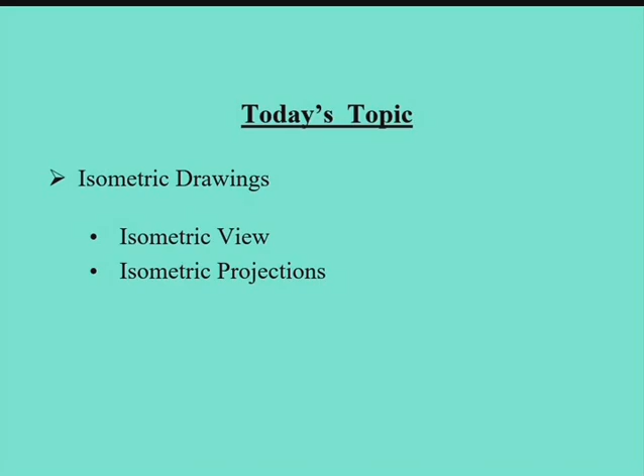Now what is exactly the isometric drawings? It's a type of pictorial projection in which all three dimensions of an object are shown in one view, and if required, their actual size can be measured directly from it.

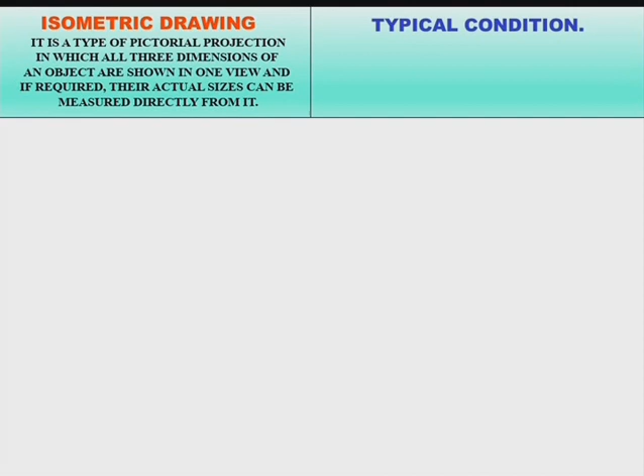This is a 3D drawing of an object. The 3-dimensional axes are maintained at equal inclinations with each other. So since this is a 3-dimensional drawing, we must have a 3-dimensional axis, and that axis is at equal inclinations - the 3 axes having an equal inclination, for example, each other having an inclination of 120 degrees.

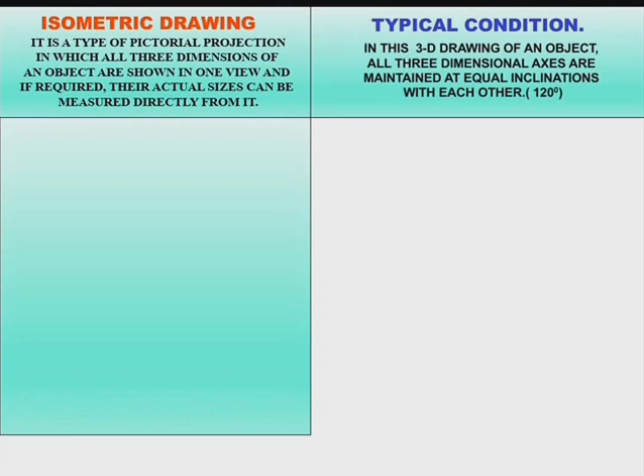And now, more about this - the isometric drawing can be drawn in numerous ways. All these drawings may be called 3-dimensional drawings, or photographic, or pictorial drawings. Here no specific relation between the H, L and D axis is maintained.

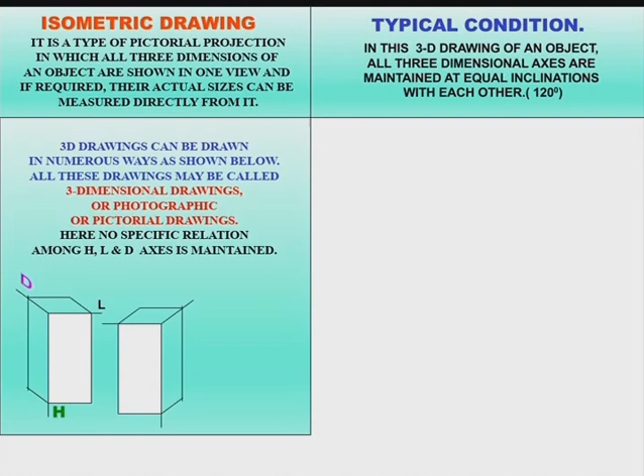So you can see a picture which has 3 axes - D, L and H. These 3 axes have equal inclinations with each other. You can see the pictures of these 3 types.

Now observe below that in the drawings one can note the specific inclination among H, L and D axis. Iso means it is the same, similar or equal. So you can see that there is an equal inclination among H, L and D axis - each is 120 degrees inclined with each other. Hence it is called isometric drawing.

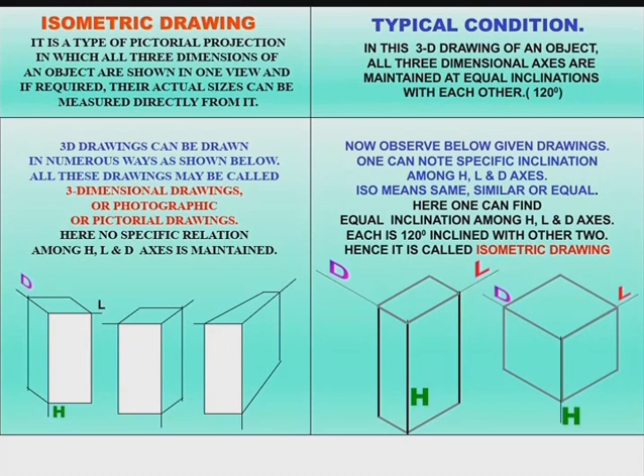Now the purpose of the isometric drawing is to understand the overall shape, size and appearance of an object prior to its production. Now we can divide isometric drawings into 2 types - one is isometric view, another one is isometric projection.

The isometric view is actually the true dimension or enlarged up to 122.5%. The isometric projection is drawn by using an isometric scale. So what is isometric scale? We will tell you about this in the next step.

So what is exactly this isometric scale - we may use the reduced dimensions also. On the left side you can see there is an isometric view, and on the right side there is an isometric projection. You can see that here one is in the true shape, or in the true dimension, or the enlarged one, in the isometric view.

Here in the middle you can see an isometric scale is drawn. How is this isometric scale drawn? There are 4 points mainly: A, B, C, D. First from point A we have to draw a line AB, then draw a 30 degree angle and 45 degree inclined lines AC and AD.

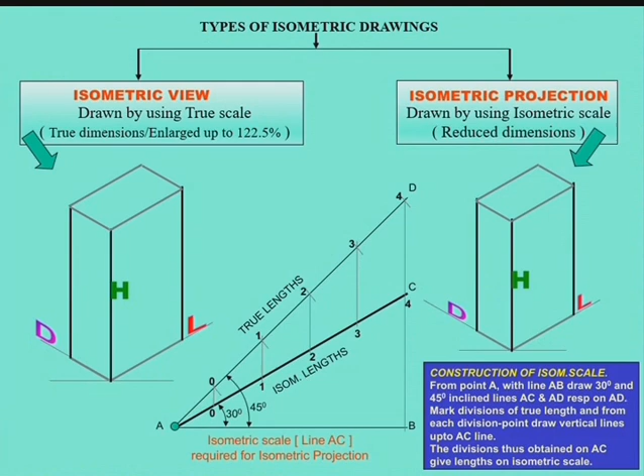When you are going to draw an isometric scale, you can see the dimensions for the isometric length - you can take this AC length. So the divisions obtained on AC give the length for an isometric scale.

Now there is an example we will study about this first problem. A square pyramid of 30 mm base sides and 50 mm long axis is centrally placed on top of a cube of 50 mm long edges. Draw its isometric view of the pair.

So there are two solid shapes actually. One is a cube and one is a square pyramid. So when you place this cube over a floor, over that you have to place a square pyramid.

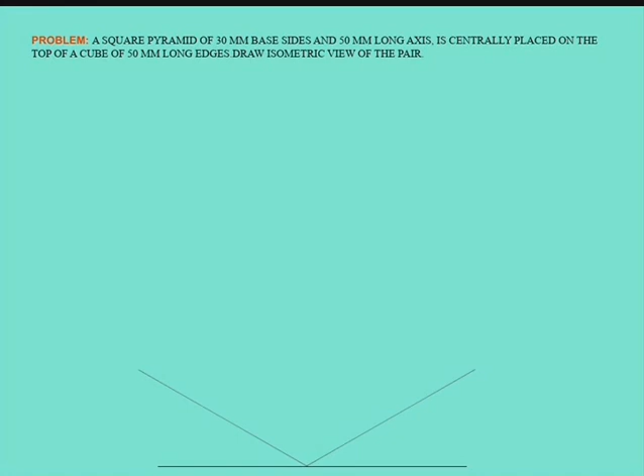Here the drawings are coming. First you have to draw an axis line and then take an angle of 30, draw two lines. These lines are in between 120 degree axis, centrally 120 degree apart.

Now you draw vertical lines, you measure that 50 mm long from the center point to that edge, and then again vertical lines in the center point, and then again take 50 and draw a vertical line.

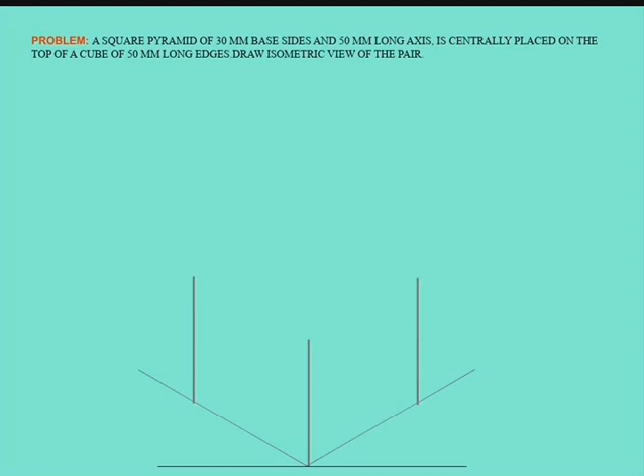So the 50 is actually the given actual length, but you have to make an isometric scale. First you have to draw an isometric scale and corresponding length for the 50, you have to draw from these 2 points. In between these 2 points you have to draw a corresponding length of the 50 mm isometric length. Now draw like this and complete the square.

Now you have to find out the center point. For that you draw two axes in the square and find the center point. And to make the dimension, here it is given that is 30 mm base side.

So now the cube is already done, but now we have to draw the square pyramid. In the square pyramid, the base is given as 30 mm, so this dark line is shown as 30 mm, inside there is 30 mm equally.

So that is 15 mm one side and 15 mm other side, making it 30 mm, 30 mm total. Now that square is closed.

Now you have to take the height. The height is 50 mm long axis, so it means that you have to take the corresponding isometric scale.

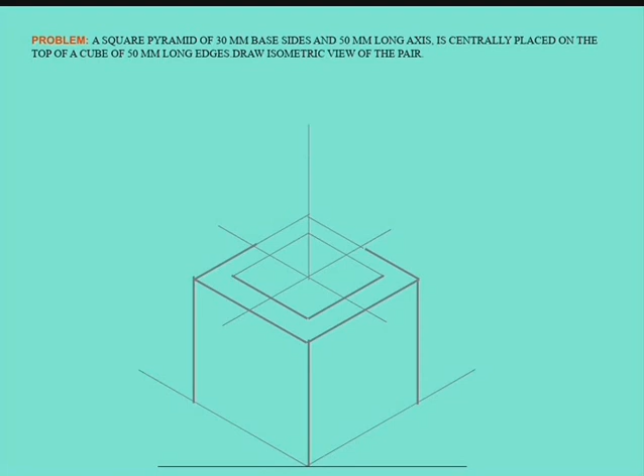Don't forget, you have to draw first the isometric scale, then take the isometric length here, corresponding isometric length of the 50 mm. Now you just mark the height as 50.

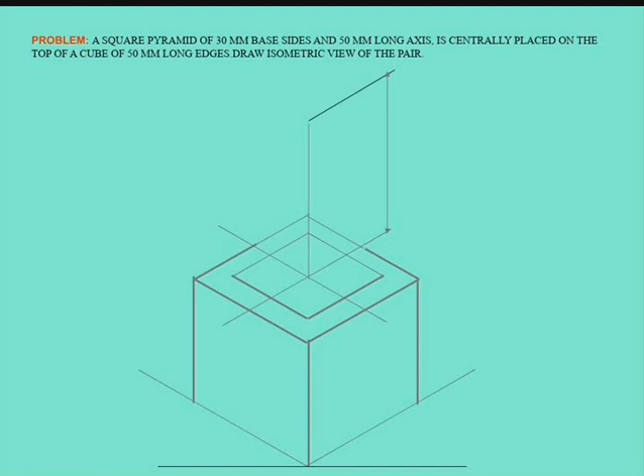Here, if you take the 50 mm isometric, don't use that length to show here as dimension marking. You have to show the 50 mm, meaning you have to show the actual length here. Don't use

the isometric length. For 50 mm, the corresponding isometric scale may come out as 35 or 40 mm. Suppose you imagine 35 or 40 mm comes, but don't use that in here. Use the actual length given in the question.

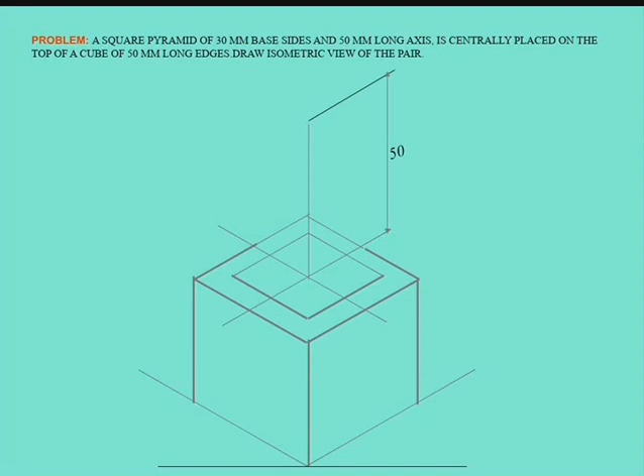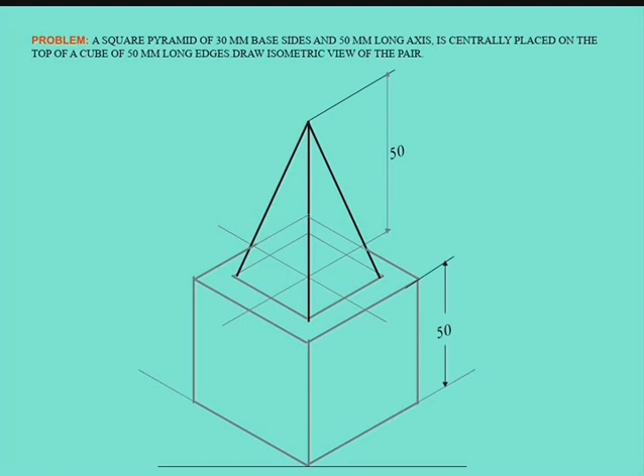Now draw from the top, because this is a pyramid, draw the four sides. Now darken the lines which are visible from here. So visible lines you darken, and draw these dimensions 50, 50, and this is 30.

So this is actually the complete isometric drawing of that square pyramid and also this cube. Remember, this is the first problem, you should clearly understand it, otherwise you can't move to the next one. I think you understand clearly.

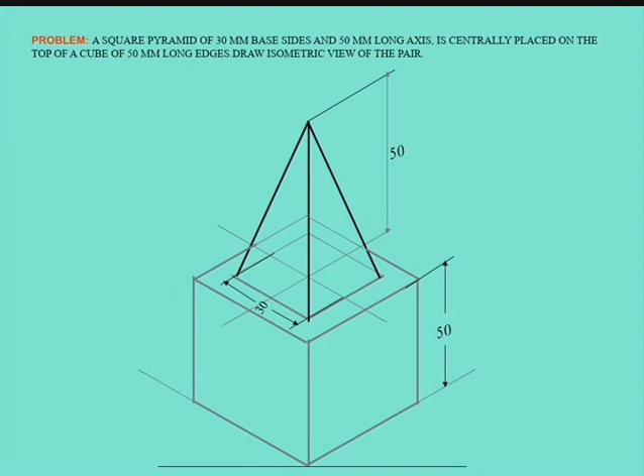First you have to take two bottom lines. First draw an xy line, then place a point, and then 30 degree from this side and 30 degree from this side. You take 30 mm here and 30 here, at 120 degree apart, and then draw the corresponding lines.

Now next problem, we move to next problem.

A triangular pyramid of 30 mm base side and 50 mm long axis is centrally placed on top of a cube of 50 mm long edges. Draw isometric view of the pair.

So what is here actually? A triangular pyramid, the base is 30. So that base is actually a triangular shape. For a triangular pyramid, base is also a triangle shape, having 3 sides also. It said that 30 mm is one of the base sides, and 50 mm is the height of that triangular pyramid.

Now the second body is a cube, that cube is 50 mm long edges. So cube means all the dimensions is 50 mm. Now the cube is placed there on a floor, and over that there is a triangular pyramid. Now we are going to that.

Solution is given. So first you have to draw a line and mark a point, and then two lines as I told you. Then the central line you have to make. That height, what it is actually, that is in the 50 mm cube. So 50 mm is the height.

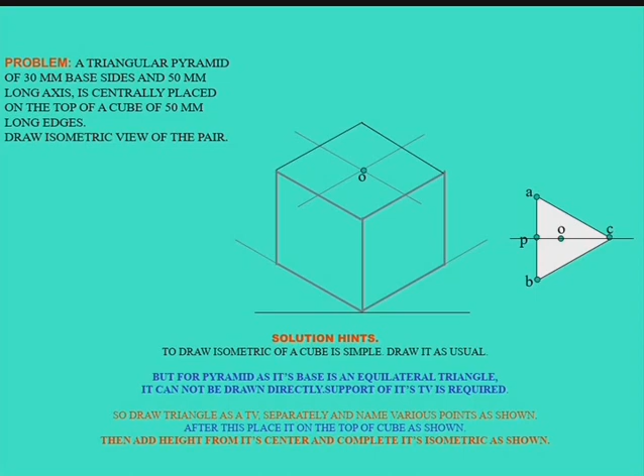So I'm going to show some points here. A, B, C is outside, and in the center I pointed as O and P. Now I just draw a horizontal line, and another horizontal line for finding the center point. So I place a center point here and name it O, and I mark the point C here, and P, and A and B I draw, and then the point C I mark here.

Now each length is a corresponding length. The AB length, how much it is in the pyramid base, is actually 30 mm. AB is 30. First you have to mark a point P. Because you find here A, B, C, you draw in the top view, you can find the O point in the center. So from the O point, how much distance is P, you find the P distance, and then from point P, 15 mm is for A and 15 mm is for B. So you can draw A and B.

If you got A and B, you just take 30 mm in your compass, or you can take it as an angle, or angular dimension, at C you can make it. Or 60 degree, 60 degree you can mark, because it is a triangle, so each one is 60 degree, so you can mark the point C easily. Or you can find O to C distance and mark it here also. So anyway, you first understand all the dimensions, you have to take it from the isometric scale.

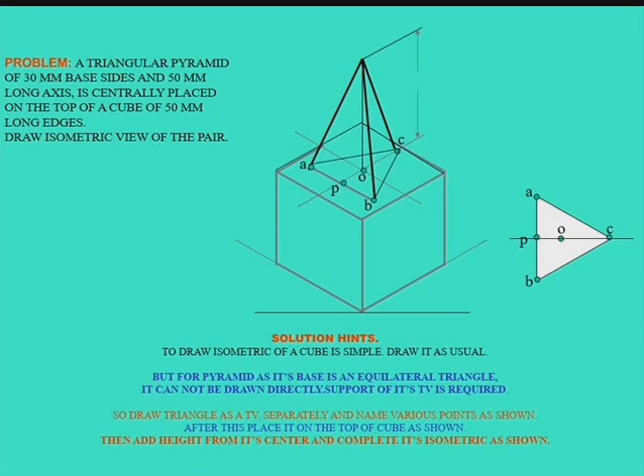Now draw each line in here corresponding to the points, and darken the visible lines, and here it is your triangular pyramid. Then you have to mark the dimensions later - I just forgot to mark them. You have to draw the dimensions also. So this is about the second problem.

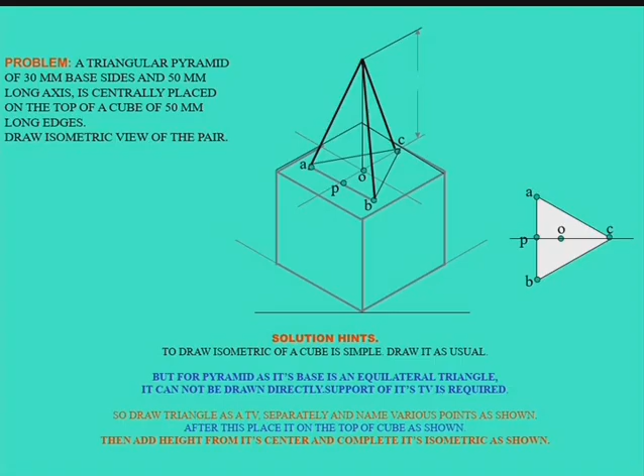Coming to the third problem, here you can see there is a cylinder and a square plate. There is a long cylinder, and in between the cylinders there is a square plate, and you have to draw an isometric view of this. So the front view and top view of this figure is given here. A square plate is placed, pierced centrally, and a cylinder comes out equally from both faces of the plate. The front view and top view are shown, and you have to draw its isometric view.

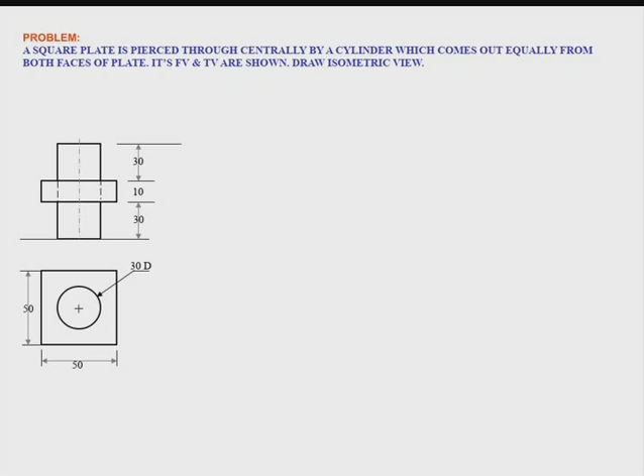So that spelling was a mistake, sorry. Now you are going to draw this - the front view and top view are given, and as I told you, you have to draw a line, with two lines equally inclined.

Then you just draw the height - this height is actually 10 mm, the height of this box. The length, you know, is 50 mm because it is 50 mm lengthwise and widthwise, so you have to draw that, and the height given is 10 mm.

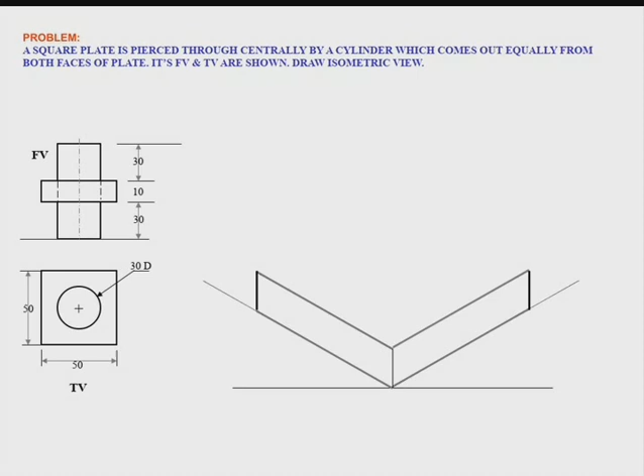All the dimensions you should take from the isometric scale - don't forget that. Now draw these lines and complete this - not a cube, actually a rectangular plate, a square plate. Now mark the center.

So you just mark the center, and inside you have to draw a square. Why is this square important? Because inside this square we have to draw the circle. So you have to draw the circle.

The circle is actually 30 mm diameter, so you have to mark 15 mm on the right side and 15 mm on the left side, upper and lower, to make a square. So the distance from the center is 15 mm and 15 mm, and here you will get a circle.

But in the case of isometric view, the circle is shown as an elliptical shape. When you draw a circle in pictorial view, in the isometric view it looks just like an ellipse. So to get that, if you want to draw any circle in an isometric view, you first have to draw a square plate.

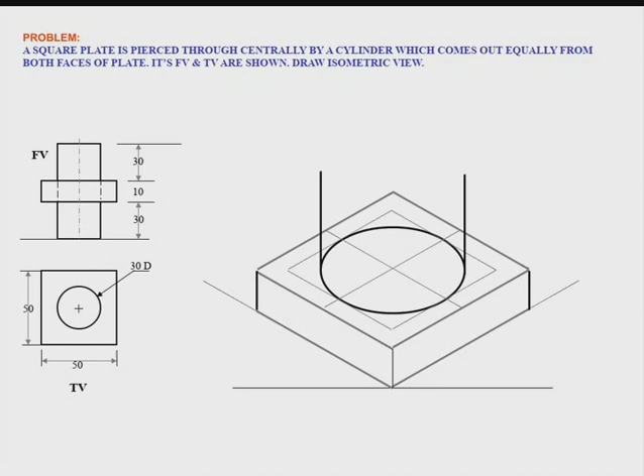Now you have to mark the cylinder height - this is the upper part height, given as 30 mm. Draw the 30 mm height from the center on both end sides. Now you have to draw another axis at the top point, and another circle. Now this is only the upper part.

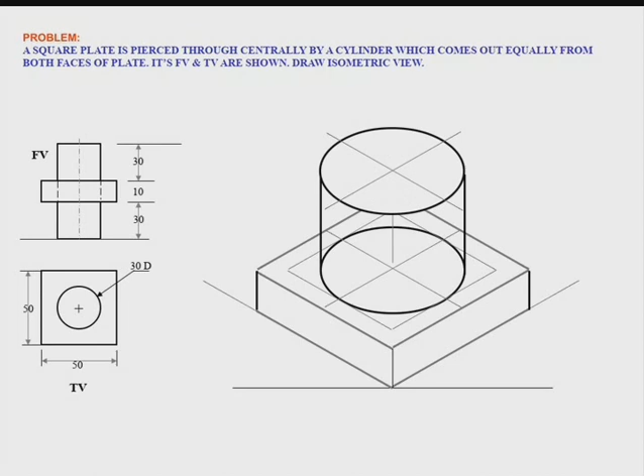Now we have to draw the lower part. Same as before, you have to remove the inside of the cylinder to get a clear picture, because from this side of view, when we see the object, we can't see inside what happens, or that corner of the square plate we cannot see.

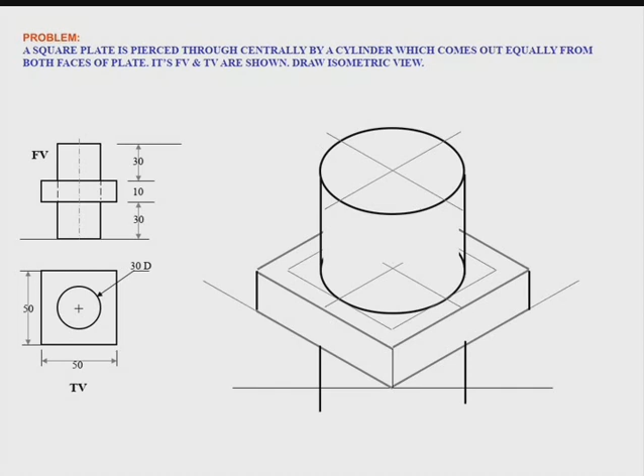So just draw two lines in the bottom, corresponding from the cylinder, exactly matching the circle, and remove the inside part - only keep the outside part. So this will be the picture, the isometric view of the object.

Now another question - this one is a little bit tougher. You have to clearly understand this question properly, because it has been asked in the university exam. A hemisphere is centrally placed on the top of a frustum of a cone. Draw the isometric projections of the assembly.

Okay, so this question is very important. As you know, what is a frustum? A frustum is something like a pyramid-like shape where the top portion is cut out. The bottom remaining portion is actually the frustum.

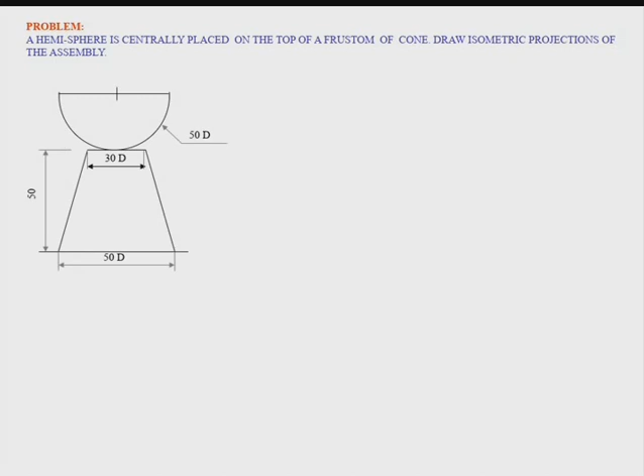Now, for the isometric view, first we have to draw the isometric scale. You can see this is a 30 and 45 degree axis, and the radius. The radius of the sphere inside, I draw as the small r. The small r is the isometric scale value, so capital R becomes the small r. That is applicable throughout.

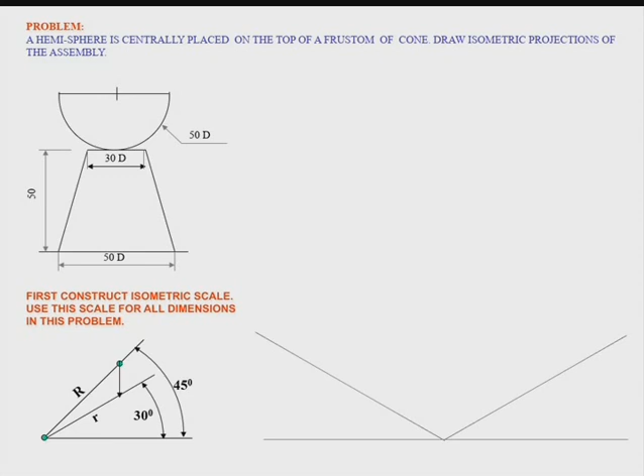Now first you draw the axis line, and second you have to draw the square plate. First the square plate, and then you draw the height. The height is actually 50 mm. So in the isometric, what will be the height? You have to draw it, and then complete the square. You don't need to, but you have to mark the center point.

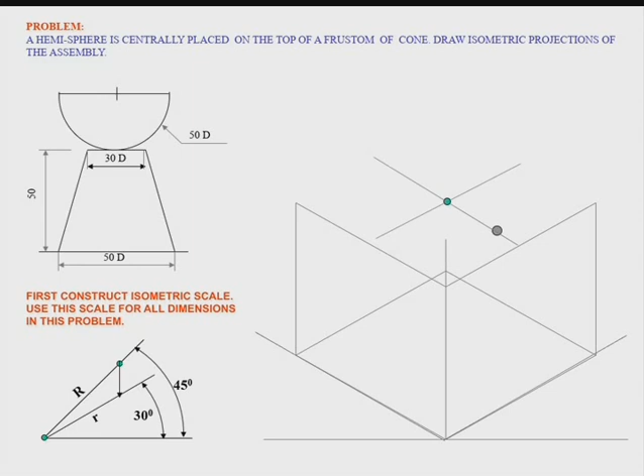From the center point, you mark from the another point which is in the top view. You can see there is a 30 diameter given at the top of the frustum. So for that frustum top, we have to mark the 4 points on the axis line and circle them.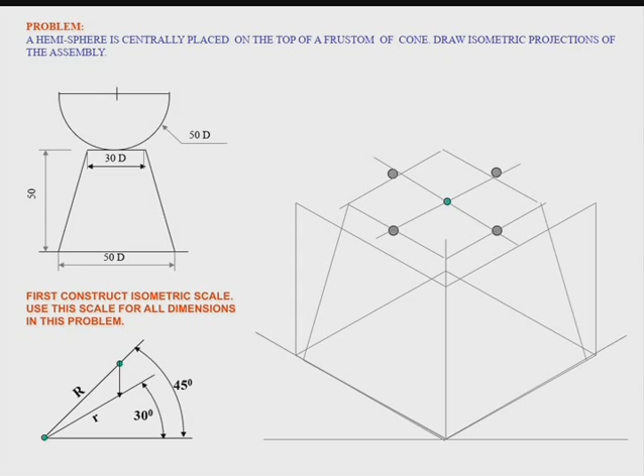So a square is drawn for drawing the circle, and then each side I am going to draw and darken it. So the circle is going to be drawn. Already drew the circle, and now the bottom is also a circle. I draw the circle, and now the sides.

You can see here in the front view there is a 50 diameter and 30 diameter, in the upper side and the lower side. 50 diameter is in the lower side and 30 diameter is in the upper side. So from this we understand that only the front view is given, and this is a circular shape in the bottom and a circular shape in the upper one.

For that drawing we draw two squares: the bigger square in the bottom and the smaller square in the top portion. So actually you don't need to draw exactly; you just need to draw the lower square, the height, and then the upper square only. That is enough for you, but for getting more clarity, I just construct all these lines.

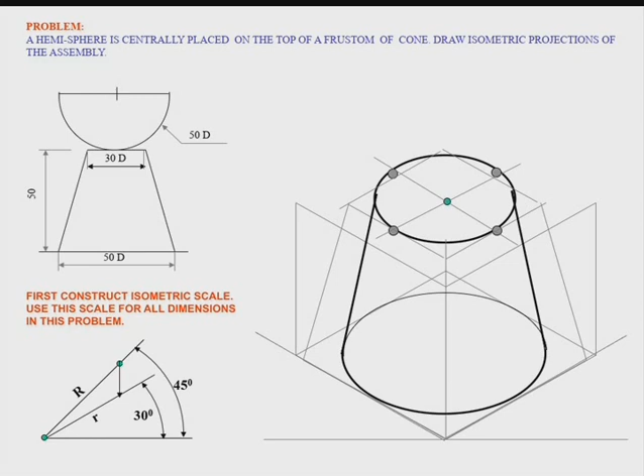Now we have to draw this hemisphere. That is a very tough part here. So P and the small height, how much is that actually? Here you are given the 50 diameter for the hemisphere. So diameter is 50, meaning the radius, or the height, will be 25. So the total diameter means from the bottom to top height.

So it is 25, actually 25 mm is there, but you have to draw 25 as an isometric scale value. You have to take it in the isometric scale and mark it. Now the small r is given. The capital R is represented as the 50 diameter, and you have to draw it as a small r corresponding isometric scale value. So from the capital R you have to draw a circle.

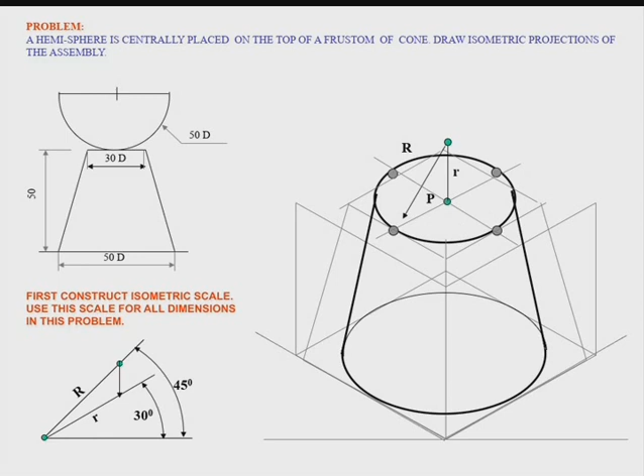From the topmost point of small r, taking that as the center point, draw an arc. Let me show you once more. So you draw a height, mark the point as a small point, and then using the radius of capital R, draw a circle to form a sphere.

Now what you are going to do is halve the sphere, and using the small r distance, draw an axis, a square. Then make the square, and another circle, which gives an elliptical shape. Once more I will show you.

After drawing this circle, halve it and draw the small distance along this axis, smaller on both sides. Then draw another axis horizontally, with the top and bottom at that smaller distance, and two construction lines, giving an elliptical shape.

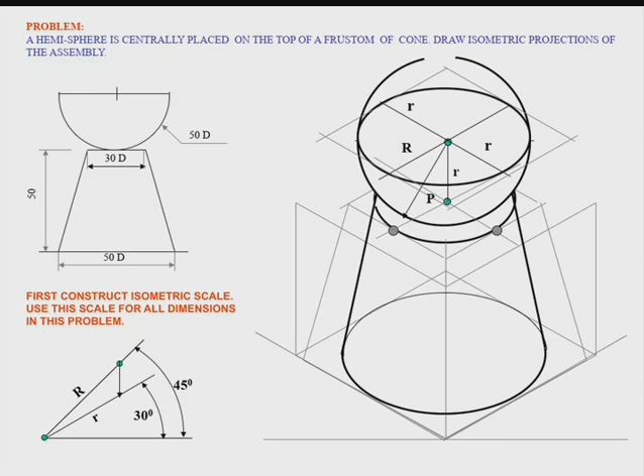Then remove all unnecessary parts, and you will get this shape for the hemispherical form centrally placed over the top of a frustum of a cone. I think now you understand this is a little bit tough part.

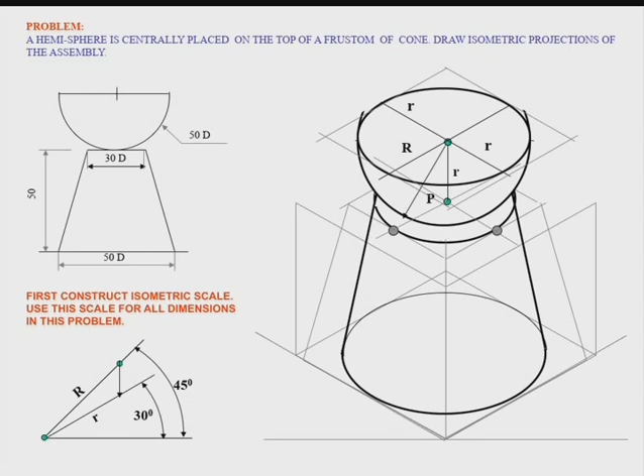This problem is a little bit tough, so that is why I told you. Concentrate well, as every problem is different in isometric drawing. It depends on how clear your imagination is. You have to imagine every problem and how you are going to draw it, and practice is also important.

Now the next problem: a front view and top view of an object is given, having a cylindrical portion, a height and a slant, and a plate. The plate has a height of 10 mm, the cylinder portion has a height of 40 mm, the width of the plate is 50 mm, and the total length of the plate is 80 mm.

Now you should clearly understand all these dimensions. If any dimension is not given, find it out from the other dimensions. Here, the distance of the central portion is not given, but you can see there are two edges. I will draw it.

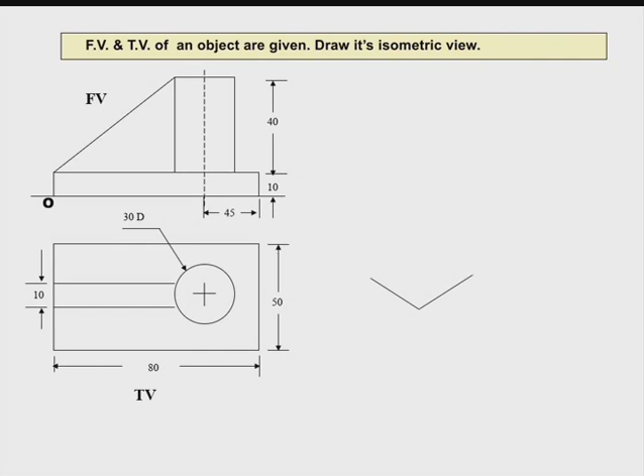First we draw a line, then in a similar manner mark it as O, and draw another line. This is the plate I'm going to draw. Now the plate is completed.

So one of the corners I picked up, that is point O, and from that corner I draw it. Now the plate is ready. The height of the plate is 10 mm, one side of the length is 80 mm, and the other side, the width, is 50 mm.

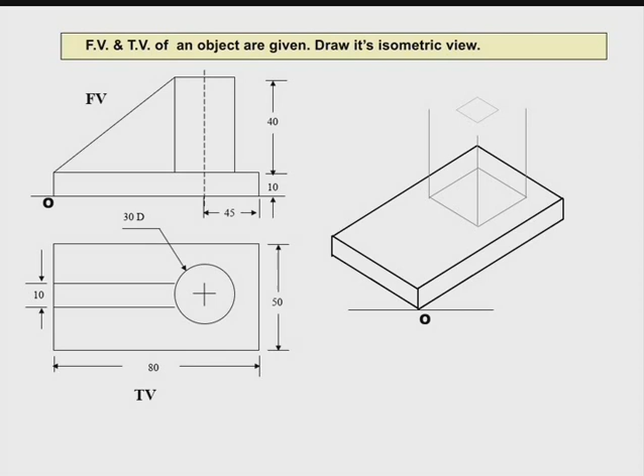Now I'm going to draw a square centrally placed, because whenever there is a cylindrical or circular shape, you have to draw a square first. So I placed the square and the cylinder, top and bottom, and joined it. Now the cylindrical portion is there.

Now I place these side lines, the slanted lines, drawing from here to there, and remove the unnecessary parts. The drawing is now completed.

So this is what happens here, and you should be aware of all these dimensions: the height of the cylinder is 40 mm, the height of the plate is 10 mm, and the diameter of this cylinder is 30 mm. You should be well aware of all these dimensions.

When you get a front view and top view, you have to imagine what the shape should look like when placed in isometric view. Only then should you start the drawing. Before that, you have to do the isometric scale conversion.